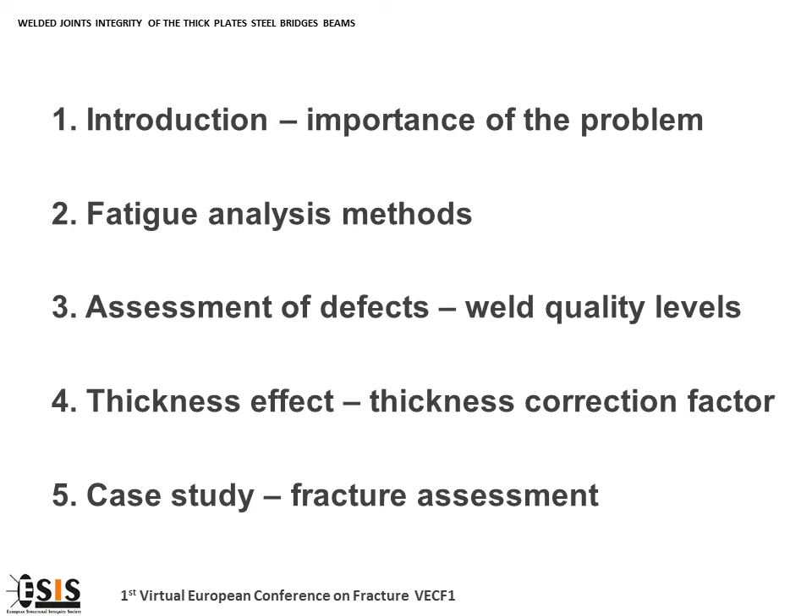The presentation is divided into 5 parts: the introduction and importance of the problem, fatigue analysis methods, assessment of defects taking into account welded quality levels, thickness effect and thickness correction factor, a case study of fracture assessment, and the conclusion.

In mechanical engineering applications, the fracture mechanics approach considers stress and the defect, then design, manufacture, and finally service lifetime estimation and inspection intervals.

In civil engineering structures subjected to low and/or high cycle fatigue, we have the stress, then design, taking into account service lifetime requirements and Eurocode provisions - Eurocode 3 Part 9, design of steel structures for fatigue loading, and Part 10, design of steel structures for material toughness.

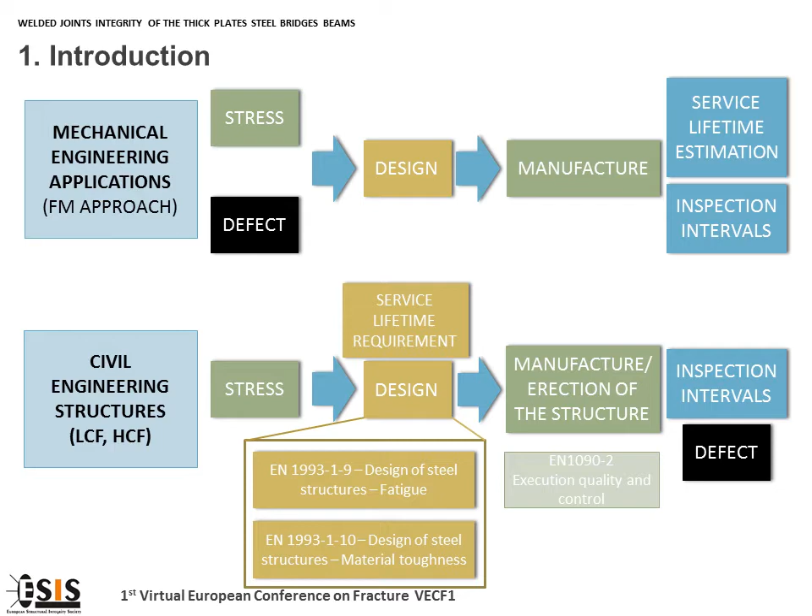We also have the manufacturing/erection of the structure, taking into account execution quality controls, and together with the inspection intervals, we will have the defect in the end.

These schemes are important because the existence of flaws in critical parts of structural elements may lead to failure of sub-assemblies, and in the case of lack of redundancy, even to collapse of the entire structure.

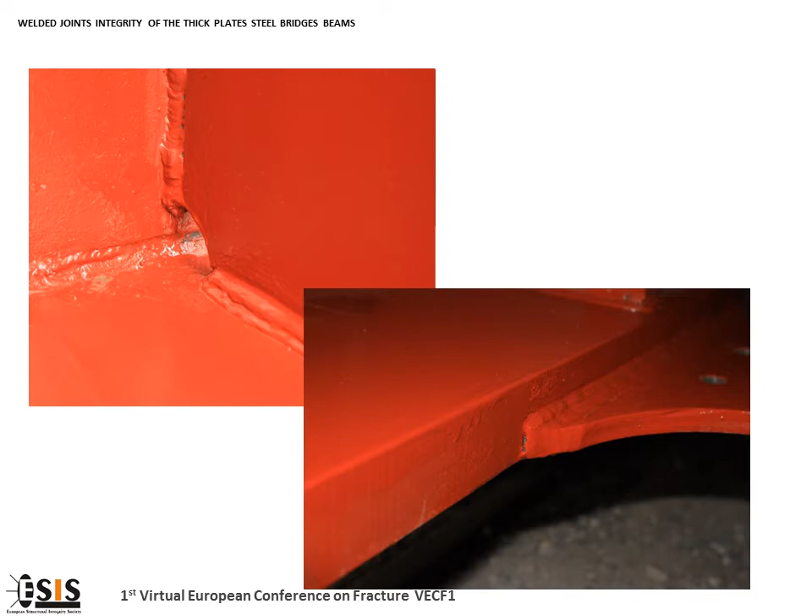Some problems: from the investigation on site, we can see different problems of welding joints, as well as surface notch type and surface type defects affecting an existing structure. This is a bridge done in Timișoara.

Also, these two pictures are taken in the manufacturing workshop.

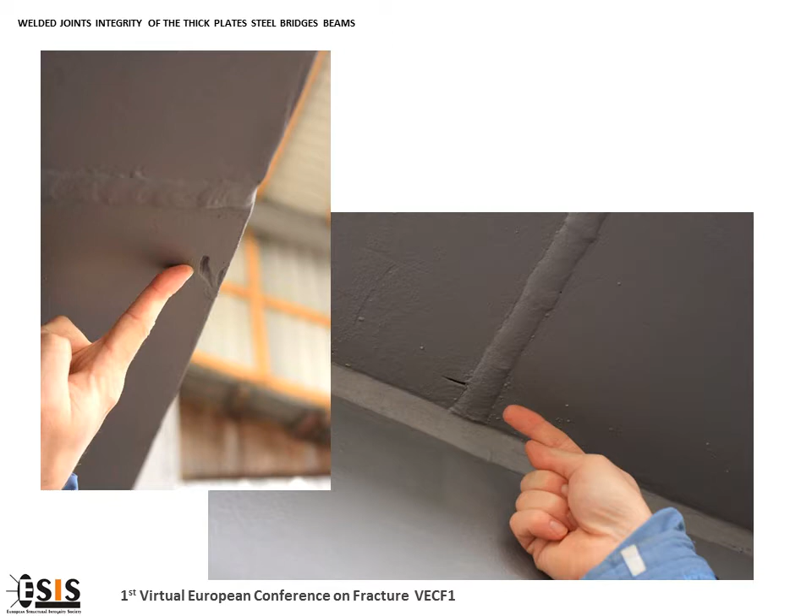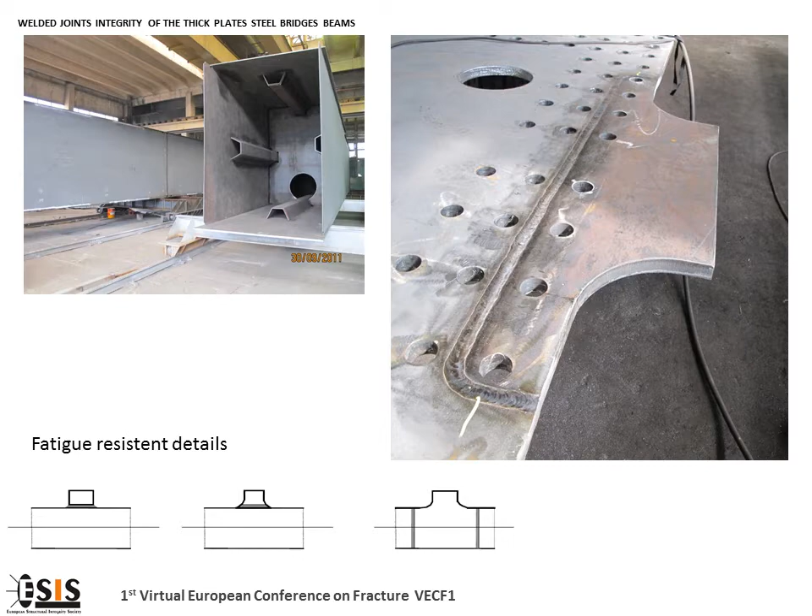Of course, we do have details that are fatigue resistant, and we can use them. This is the case of the solution presented by Professor Petzek from the Politehnica University of Timișoara.

In the next slides, I would like to present the case of the Rhine Bridge Leverkusen, a steel bridge with steel beams, which has a problem with increased traffic and increased fatigue loading.

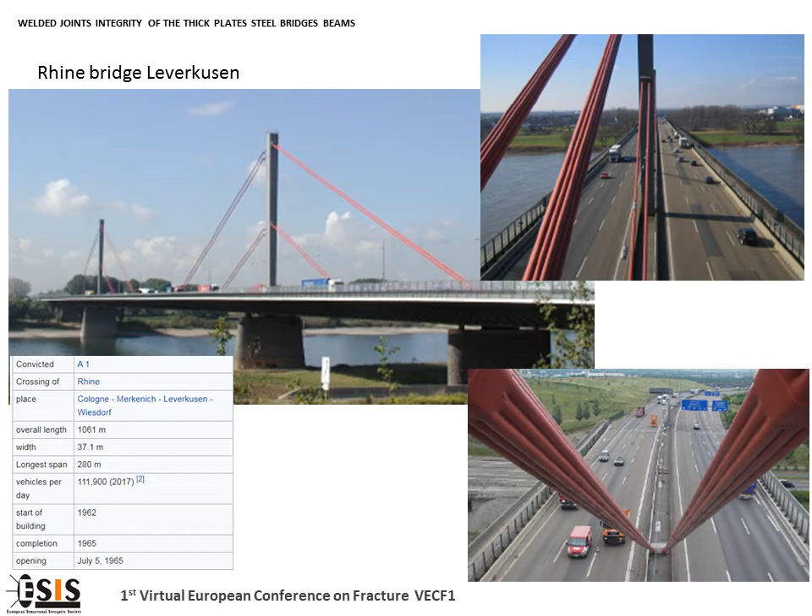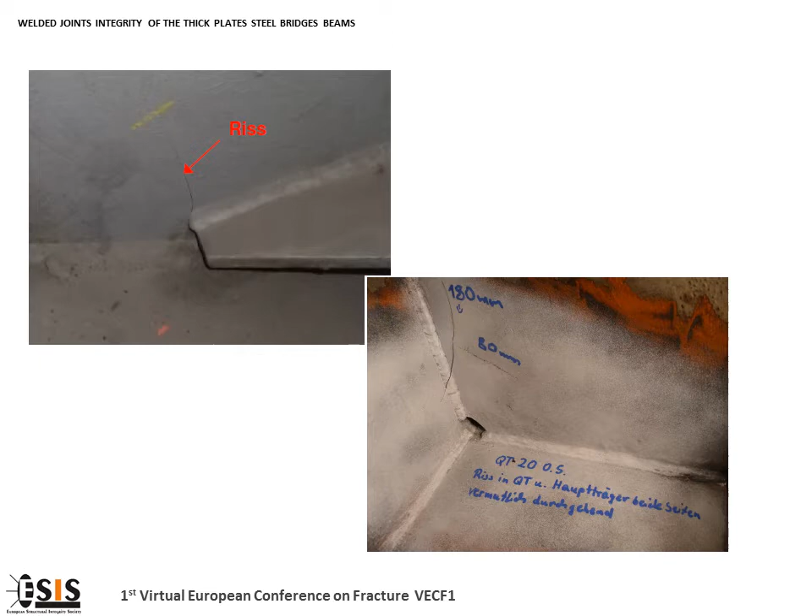In the end, during inspection, several flaws were discovered. As we can see, mainly crack-induced flaws that propagated in the area of the stiffeners from the main beam.

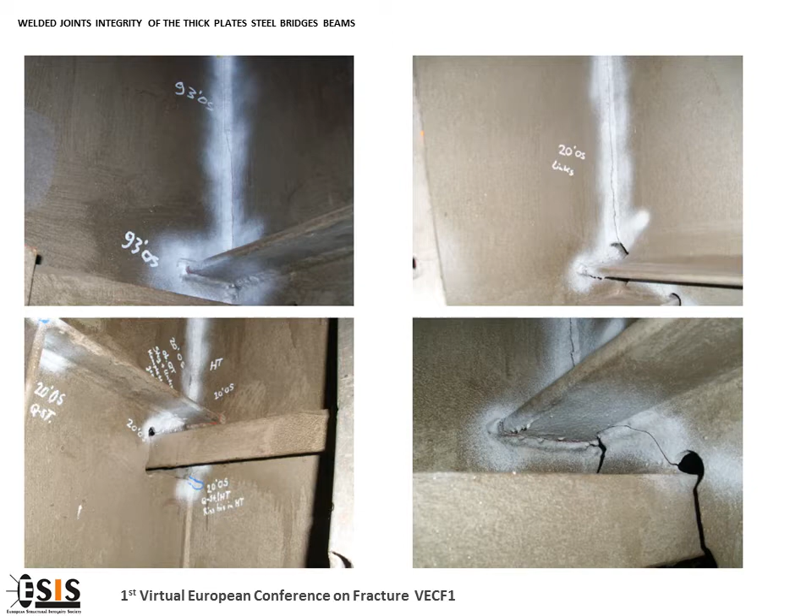Also some big problems in the welding, and not in the area of the welding, also induced by fatigue loading, in joints between the main and secondary beam.

A closer picture of the problem.

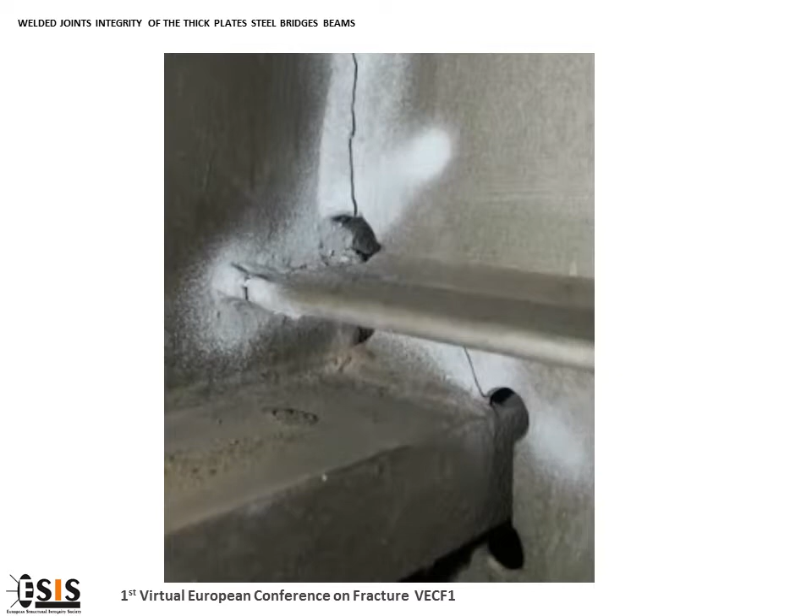Some elements regarding the fatigue analysis procedures, more or less approaches. We have a nominal stress approach, hotspot stress approach, effective notch stress approach, and finally the fracture mechanics approach.

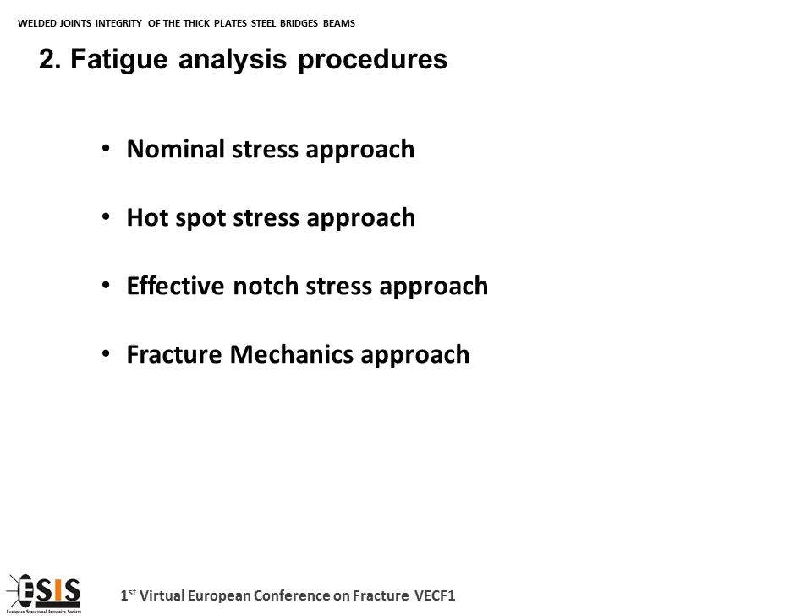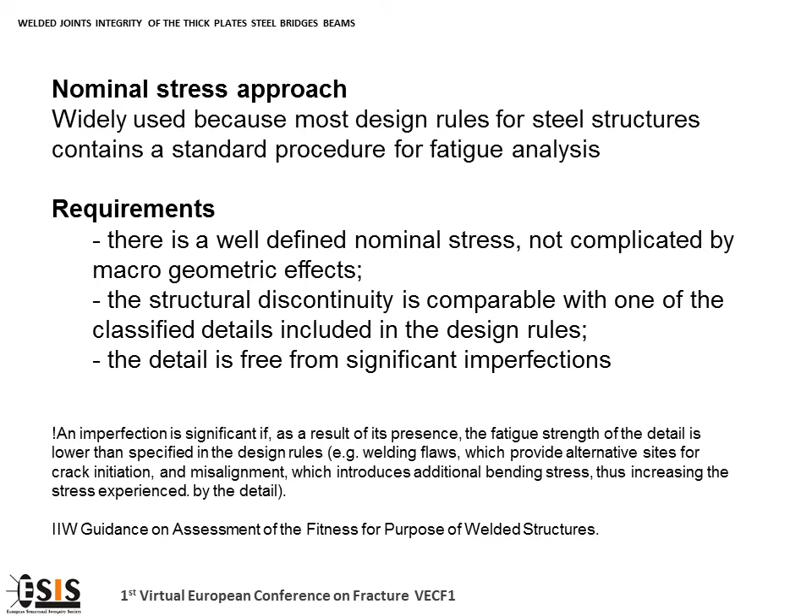Regarding the nominal stress approach, most design guidance documents related to fatigue, such as Eurocode 3 for example, are based on the nominal stress method. This is a widely used approach, and the requirement is very important - to have a detail free from significant imperfections.

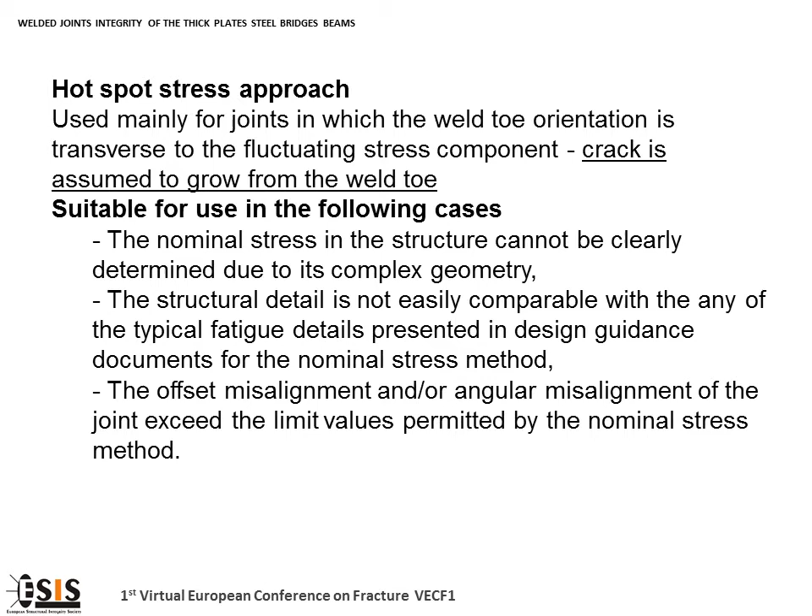The hotspot stress approach is also included in the European standards and in the latest International Institute of Welding provisions. Importantly, in contrast with the nominal stress method, where stresses are computed using simple strength of material equations, the hotspot stress method requires a more complete understanding of stress components.

At a welded joint, the stress through the wall of a plate is non-linear, for example, and the stress components can be separated.

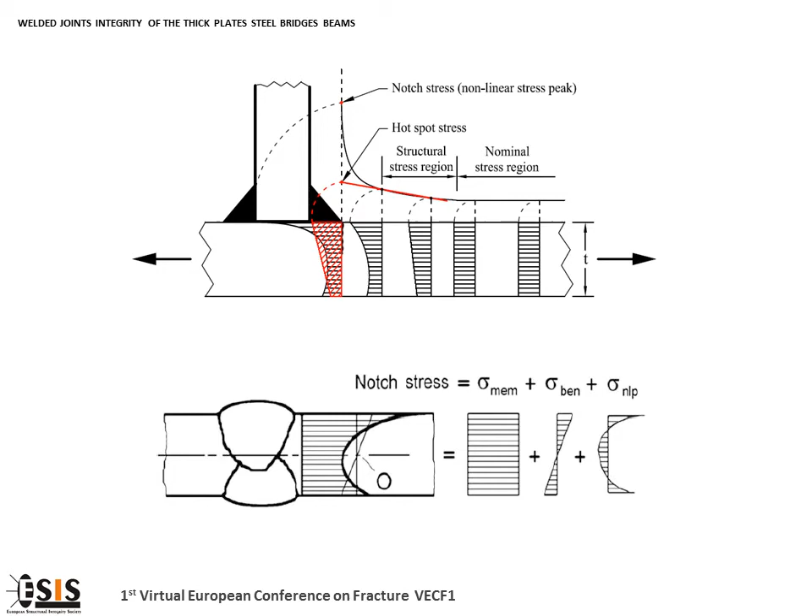The effective notch stress/strain approach is divided into a linear elastic and elastic-plastic notch stress, respectively strain, approach. The effective notch stress approach has an advantage over the other methods in that the stress value used in the analysis is unambiguous, since it is the maximum computed stress at a well-defined location in the finite element.

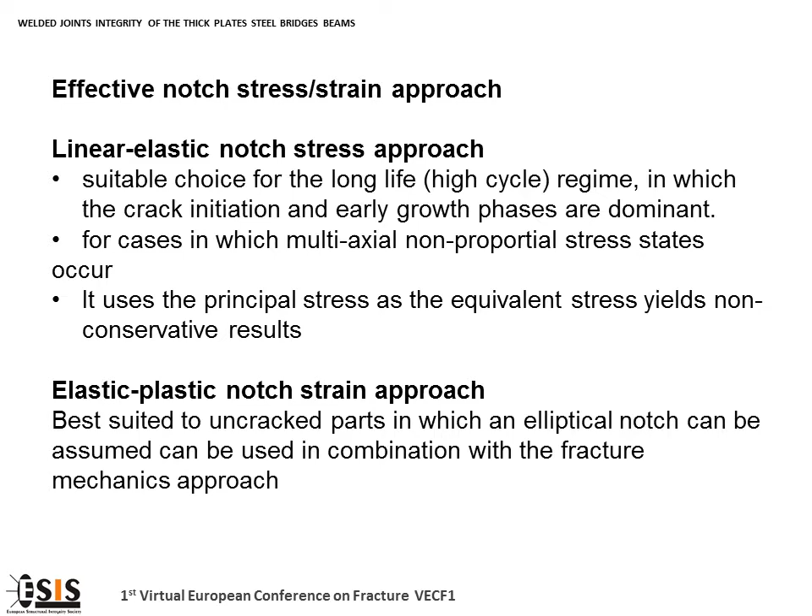The fracture mechanics method is useful for the assessment of cracks or crack-like imperfections. It requires knowledge of the notch stress distribution in the vicinity of the crack, and also a formula for determination of the stress intensity factor.

Of course, the fatigue life can be determined by using the Paris-Erdogan power law. When welded components behave like severely notched or corroded ones with a short period of crack initiation, it is reasonable to consider crack propagation as the governing process and to use this method.

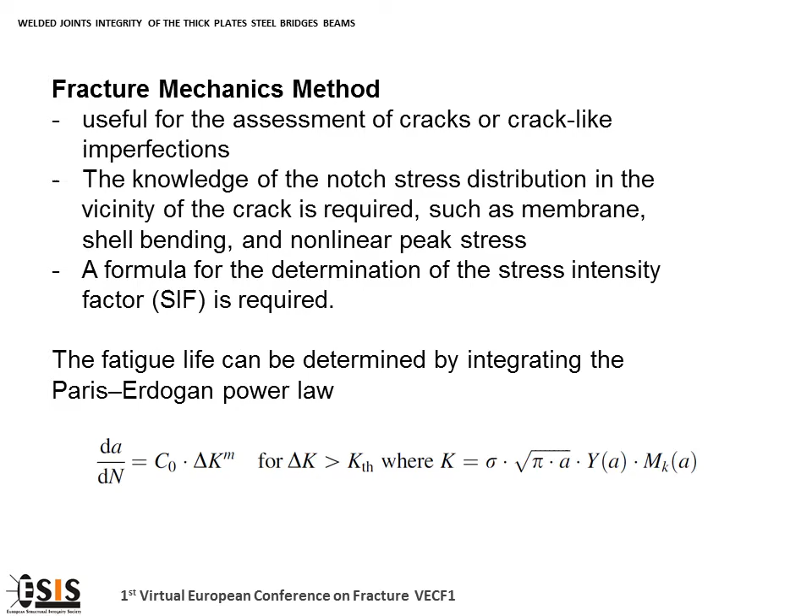Some comparisons between these four methods: we can see that the thickness effect is included only in the effective notch stress approach and the fracture mechanics approach. This is very important for the next presentation to take care of.

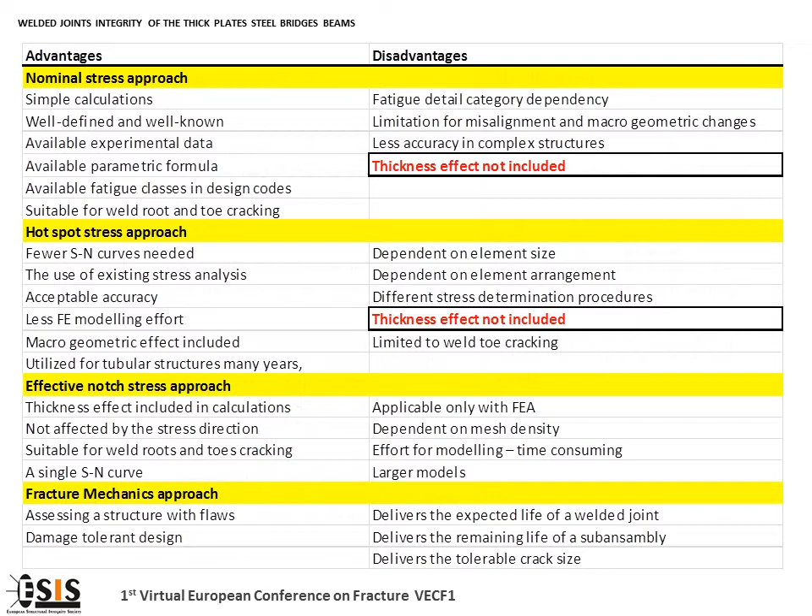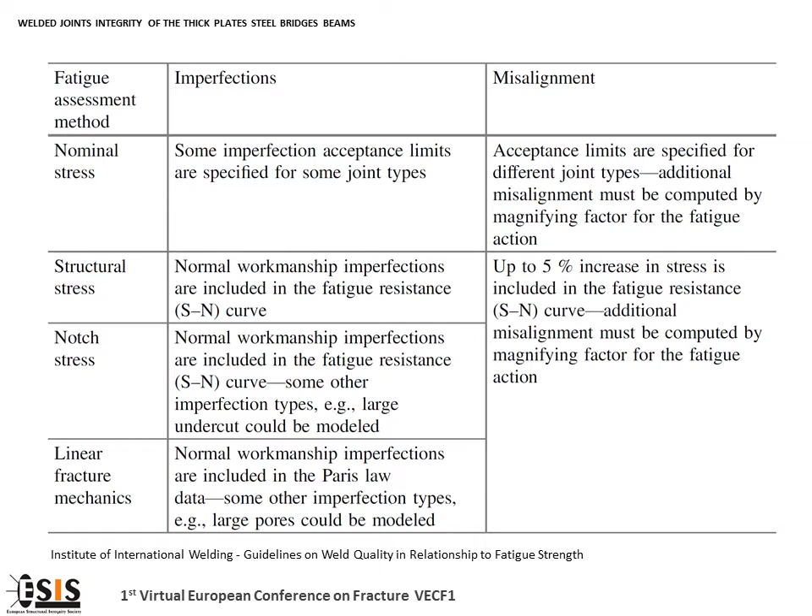The International Institute of Welding also presents some provisions regarding fatigue assessment methods, taking into account the imperfections and misalignment to consider, and also the joint classification determined based on the joint loading function - for example, the shear loaded fillet weld, the longitudinal shear loaded longitudinal fillet weld, or longitudinal normal loaded fillet weld in the B version.

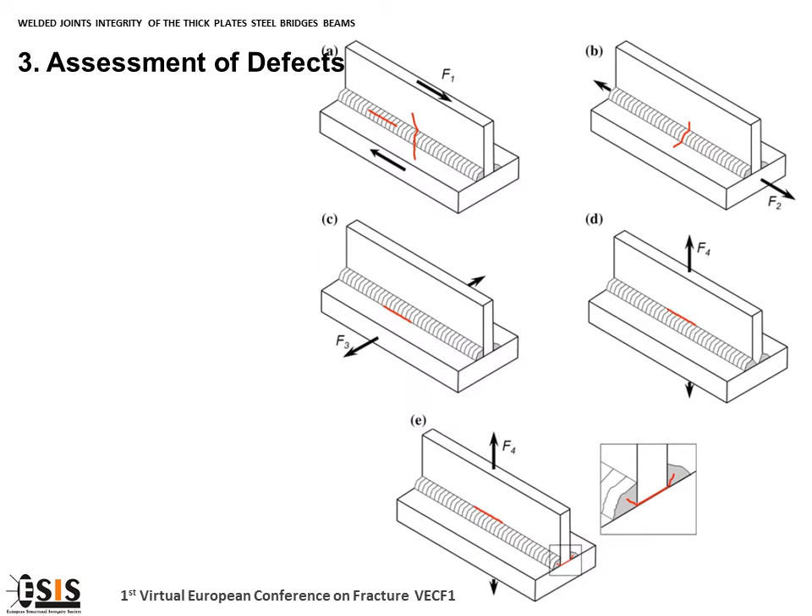The red lines indicate the fatigue critical areas. The imperfection and its classification is handled by a different standard - one of these standards is ISO 5817, but it has some limits in direct application to fatigue problems, because it is inconsistent with respect to fatigue properties and needs application guidance.

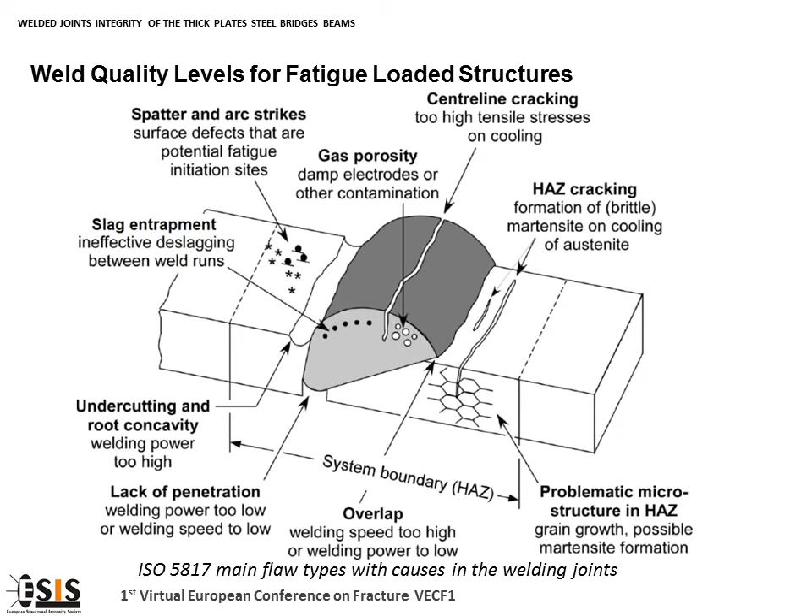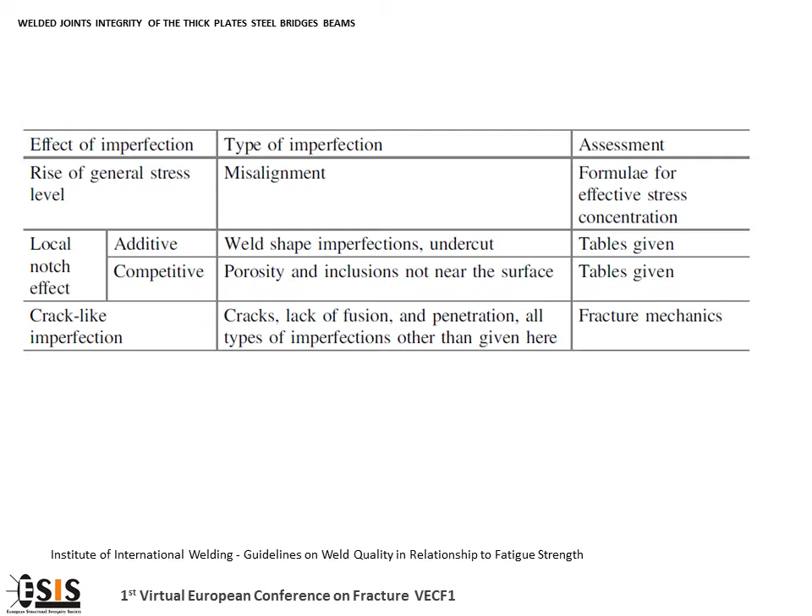After inspection and detection of a weld imperfection, the first step of the assessment procedure is to determine the type and effect of the imperfection by characterization, following the assessment of the effect of the imperfection.

Using, for example, the effective notch method, many of the above listed effects can be modeled to show the impact on fatigue in the design of experiments. In such an approach, the weld quality levels for a fatigue loaded structure are very important.

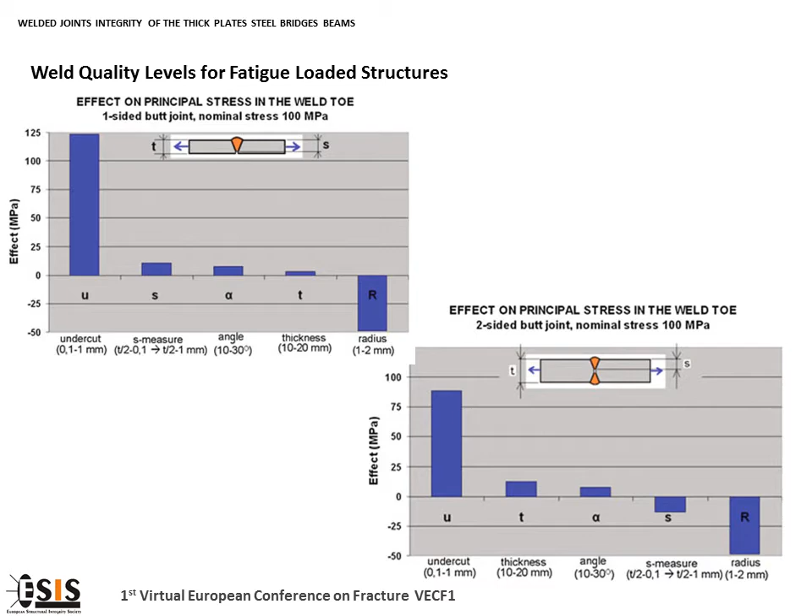Here you can see the effect on principal stress in the weld toe for one-sided or two-sided butt joints with a nominal stress of 100 megapascal. We can see the influence of thickness in both types of joint in a positive way.

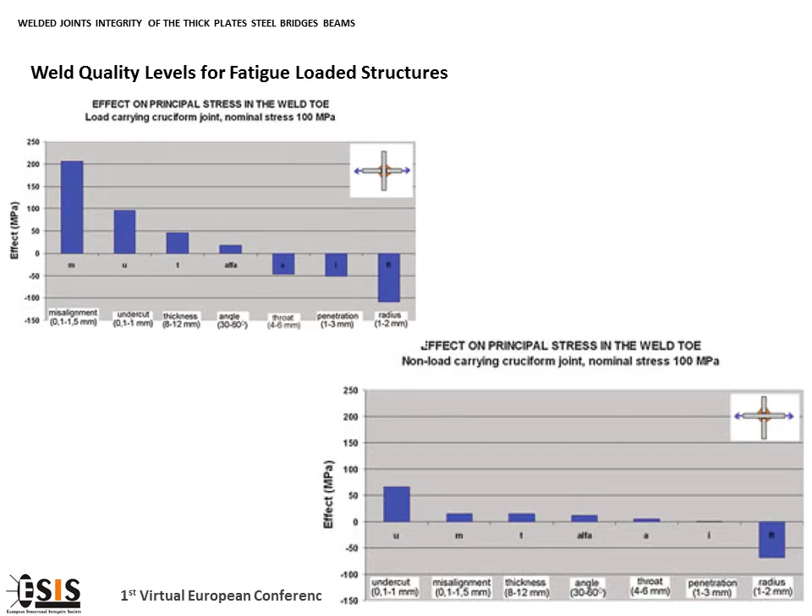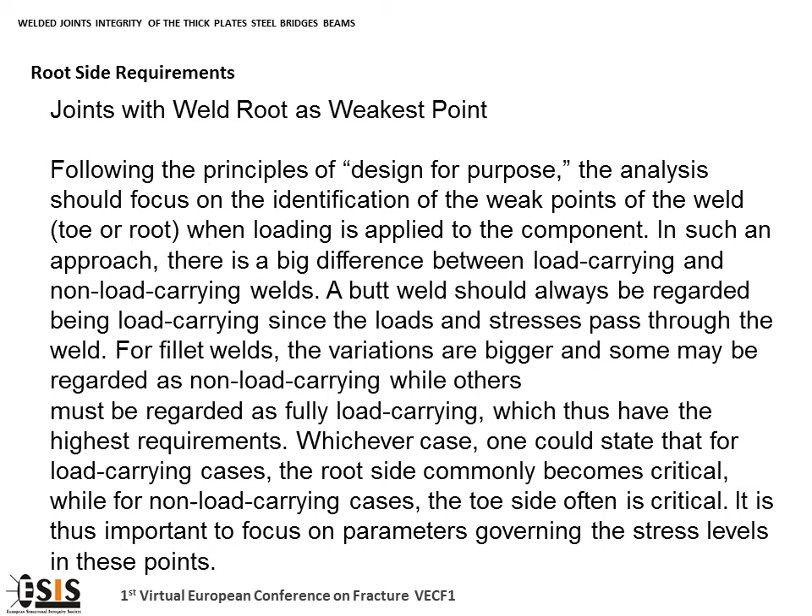Some consideration regarding the root side requirements: joints with weld root as weakest point. Following the design for purpose principle, the analysis should focus on the identification of weak points, toe or root, when loading is applied to the component.

In case of fillet welds, strength will decrease when the thickness is increased. Very important, the thickness effect is a phenomenon where the fatigue strength of a welding connection decreases when the thickness of the load carrying plate increases.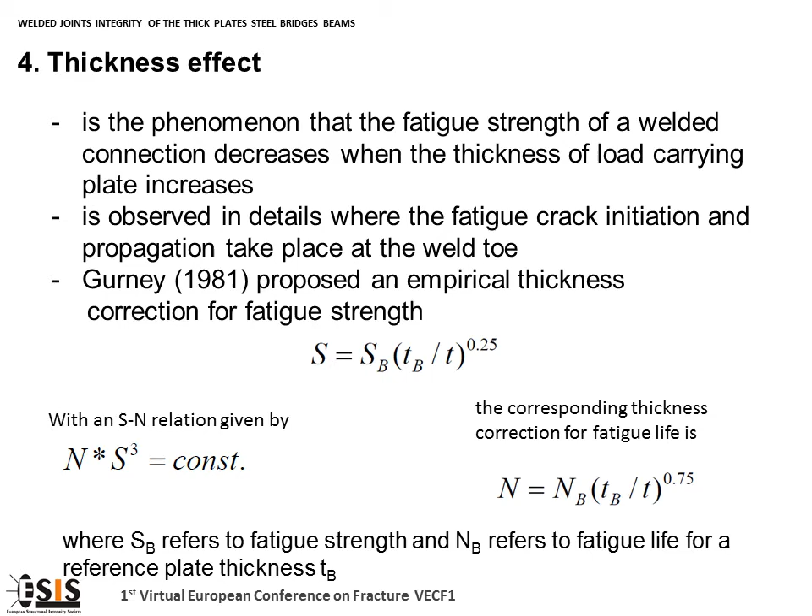It was the preoccupation of Gurney in 1981, who proposed an empirical thickness correction for fatigue strength, which takes into account fatigue strength and fatigue life for a reference plate of thickness TB.

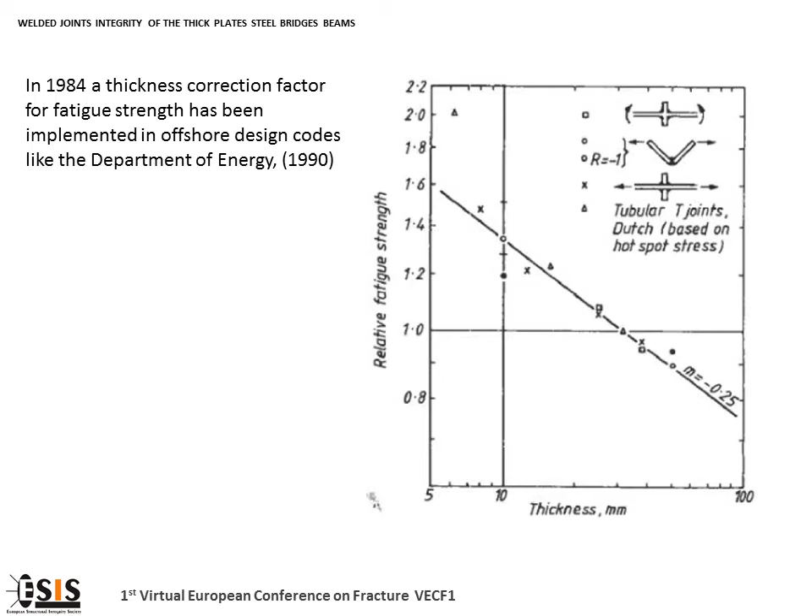Also in 1984, a thickness correction factor for fatigue strength was implemented for offshore design codes. Later, due to the research work of some Norwegian researchers, this factor was also included in the Norwegian standard steel design codes and many other codes.

From 2008, and then in 2016 with a revised version of International Institute of Welding provisions, we have the thickness of the plates and its influence on the fatigue strength taken into account, with respect to the fatigue class detail.

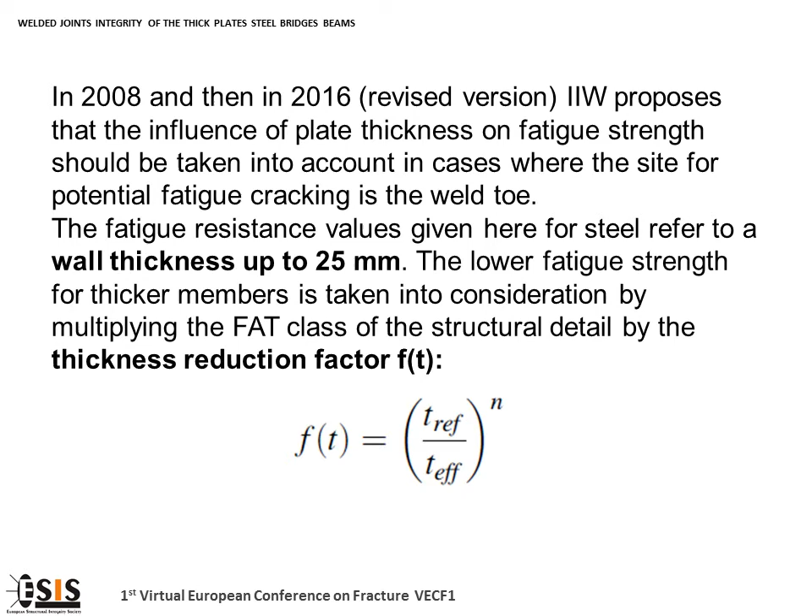So we compute a thickness reduction factor, nominated as FT, applied to both the nominal stress approach and the hotspot stress approach in Eurocode 3.

It is recommended to use in Eurocode 3 a value of 0.2 for some specific details for the nominal stress approach. These are provisions from IIW.

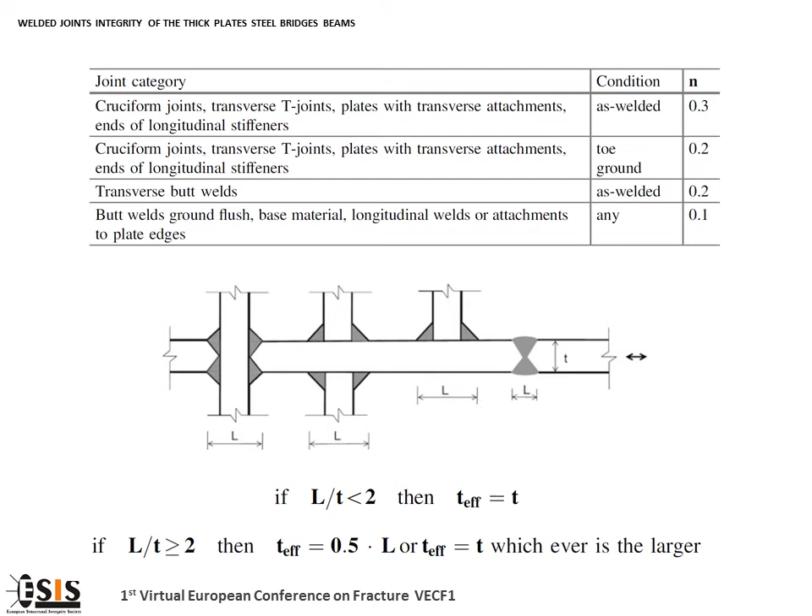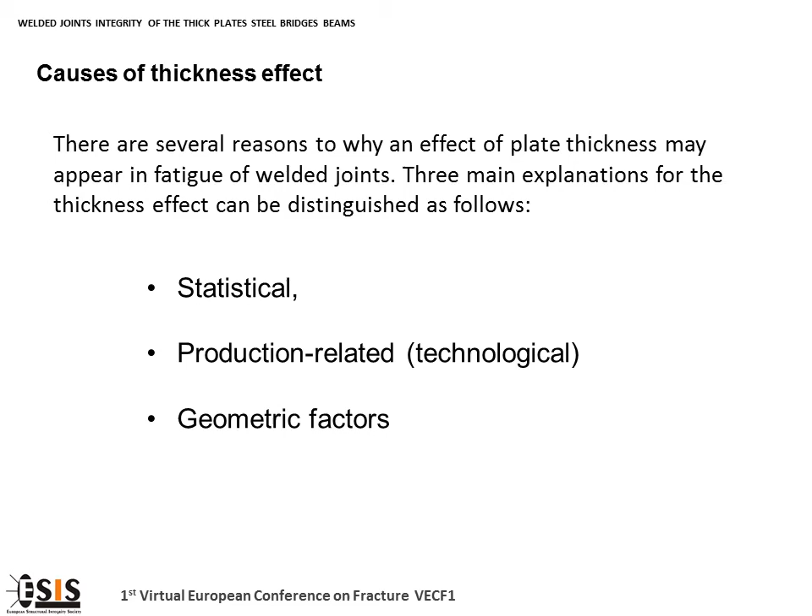Causes of the thickness effect: causes of the thickness effect are statistical, production related, or geometric factors. This is very important to be understood, and the geometric factors are playing an important role.

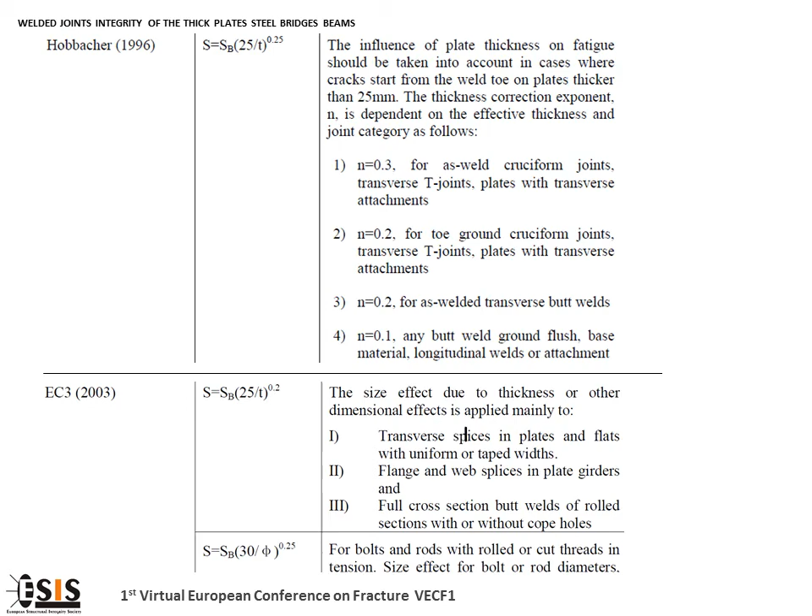From the literature, this thickness effect is taken into account, as I said, in Hobbacher and Eurocode 3, using different types of formulas, but the principle is the same. Some details from the literature present the influence and the result of the N factor.

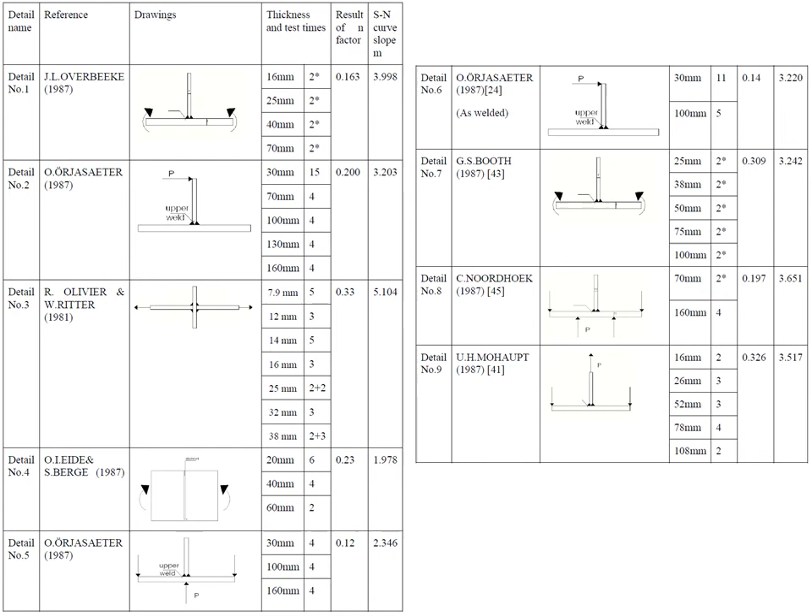Some things about a case study: the fracture assessment, determining the safety of the in-service steel structure based on fracture mechanic principles.

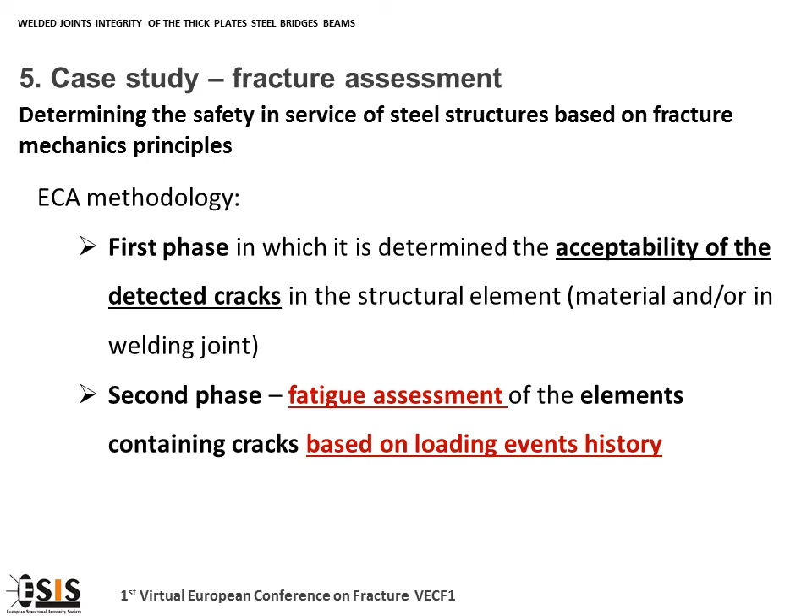Using an engineering critical assessment methodology, we have two phases. The first phase is to determine the acceptability of the detected cracks, and the second is the fatigue assessment of the elements containing cracks based on the loading.

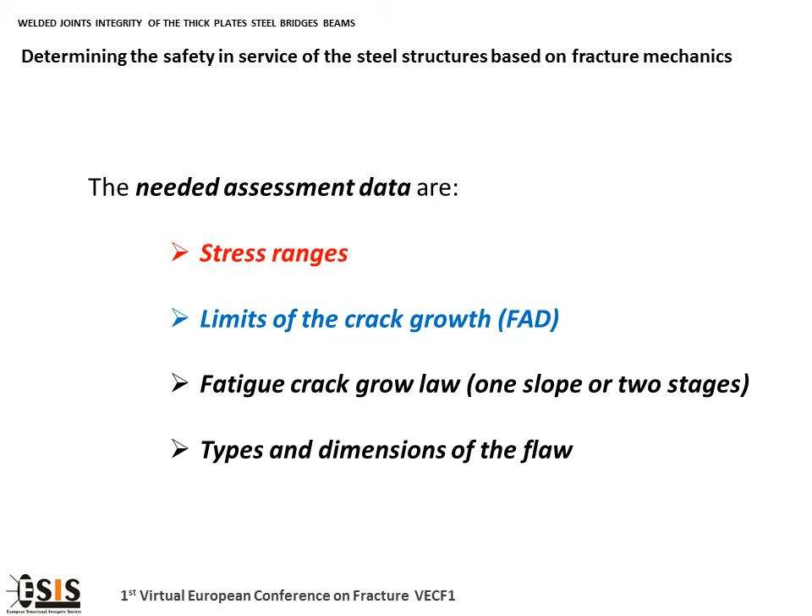The needed assessment data are the stress ranges, the limit of crack growth, the fatigue crack growth law (1 or 2 slope), and the types and dimensions.

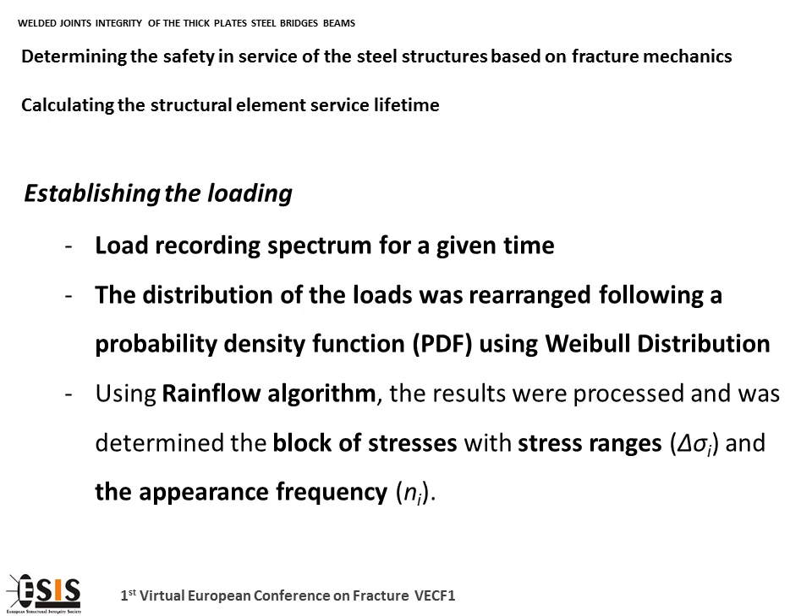As the calculation of the structural element's service lifetime is needed, we have to have a load recording spectrum for a given time, the distribution of the loads, which can be rearranged using probability density functions or Weibull distribution, and the possibility to assess the flaws.

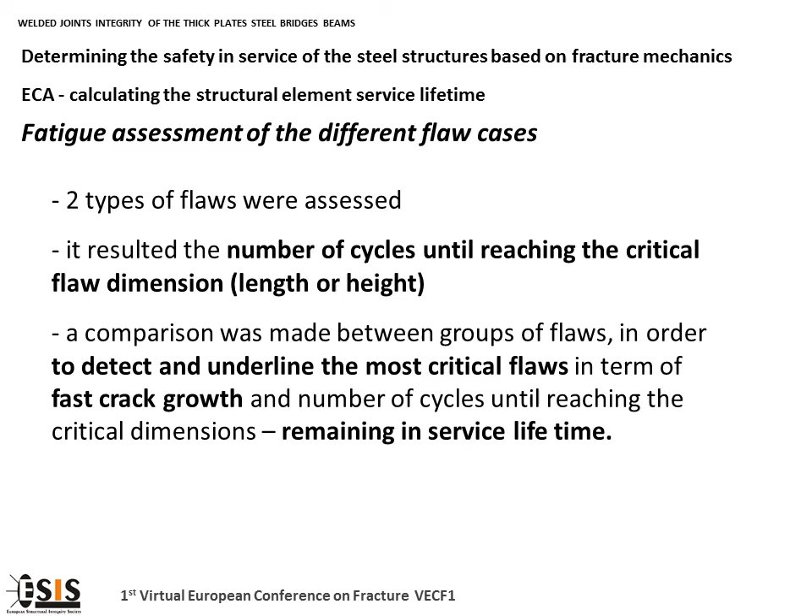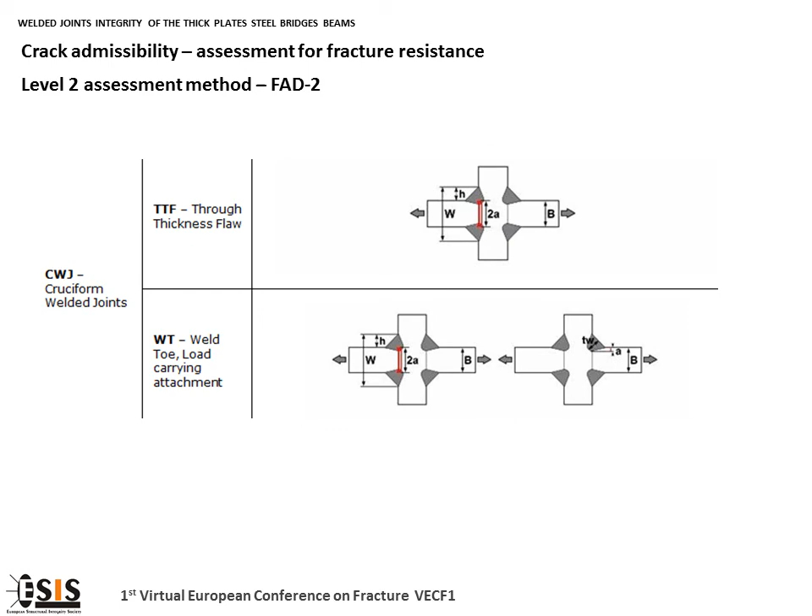Some consideration regarding the cruciform welded joints, because these types of joints were assessed through the thickness flaw and weld toe load carrying attachment. We can see here the computing of the flaw height critical and flaw critical length.

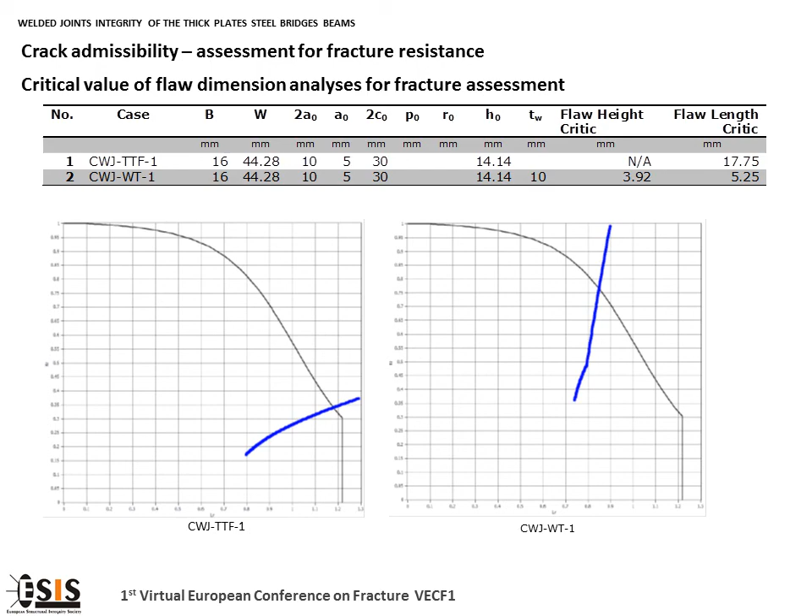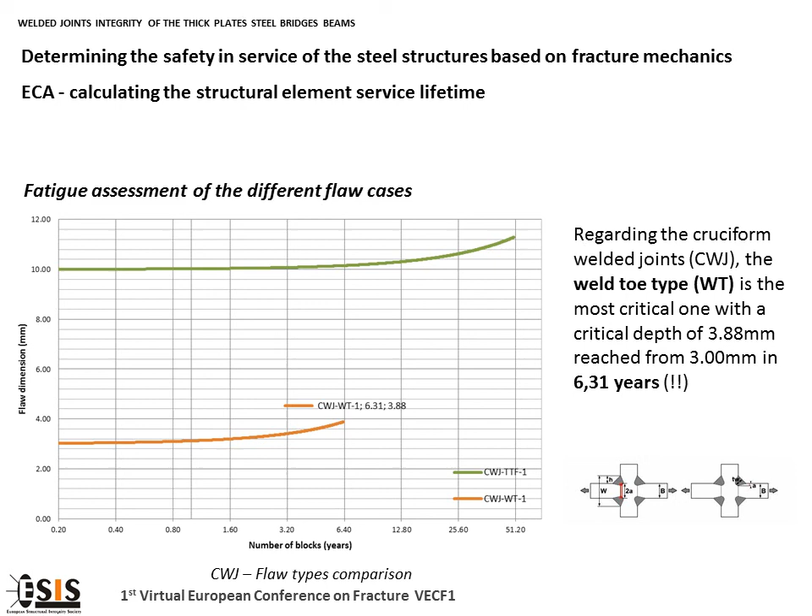Using the failure assessment diagrams, we can also compute the critical fatigue assessment of different flaw cases. We can compute also the most critical depth of a flaw.

Some conclusions of the research deal with the effect of thickness of the elements of welded steel plates. Basic structural integrity tools such as failure assessment diagrams can be used efficiently to determine the in-service safety of steel structures, underlining the design of welding details and the influence of crack type flaws on the overload behavior of welded thick plate steel elements.

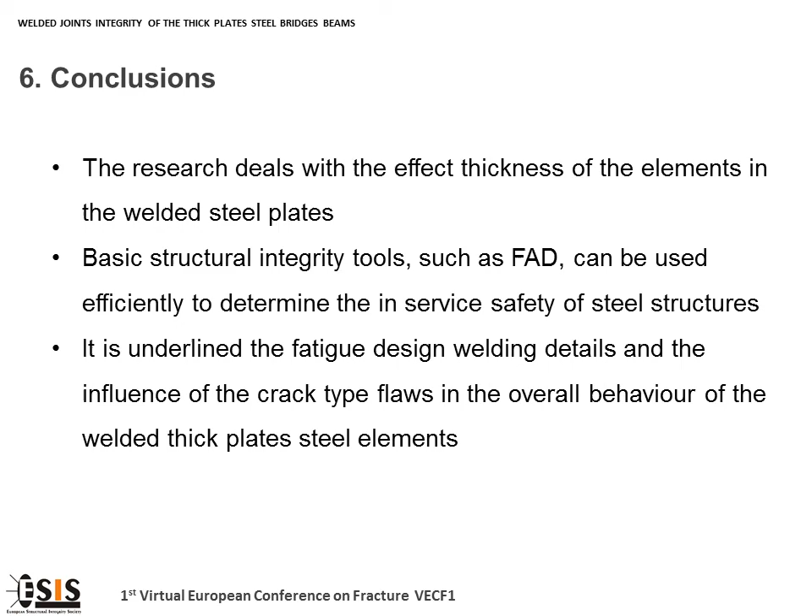As the future preoccupation is to detail more the welding. Thank you for your attention.